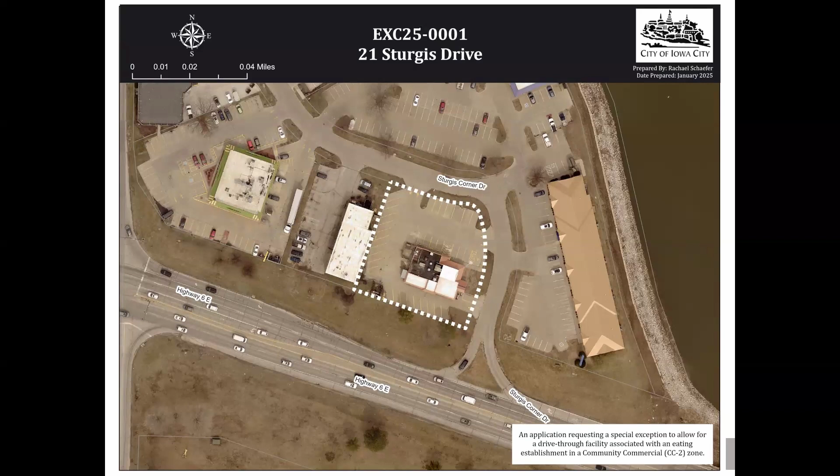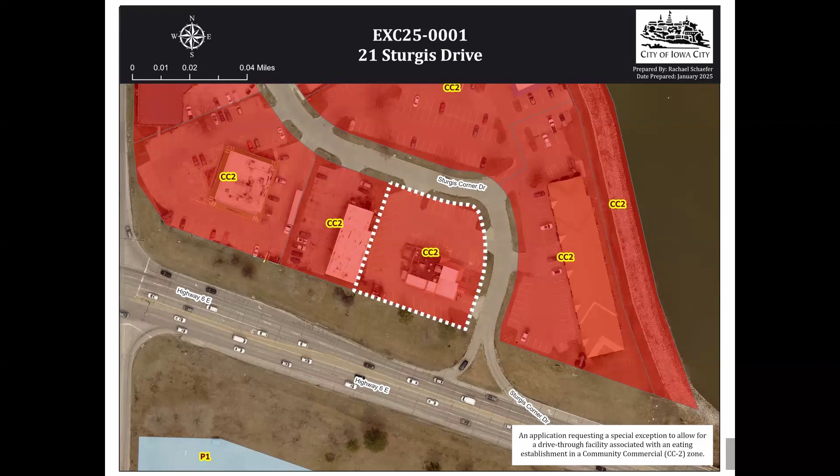To get into the background, 21 Sturgis Corner Drive is zoned CC2. Currently there is a Los Amigos restaurant occupying the existing eating establishment on site. The owner intends to maintain the same zone and use of the subject property, which is CC2 with an eating establishment use. The developer plans to demolish the existing structure and construct a new eating establishment with a drive-through facility. The new eating establishment is estimated to have around 2,300 square feet of usable space and an occupancy load of 49 people. The proposed drive-through would be a Chipotlane, a new drive-through format utilized by Chipotle.

The proposed drive-through lane will not include an order board, since its main purpose is to serve as a pickup lane for orders placed online via the app or through the website. Additionally, with this proposal, the city has requested a traffic impact study.

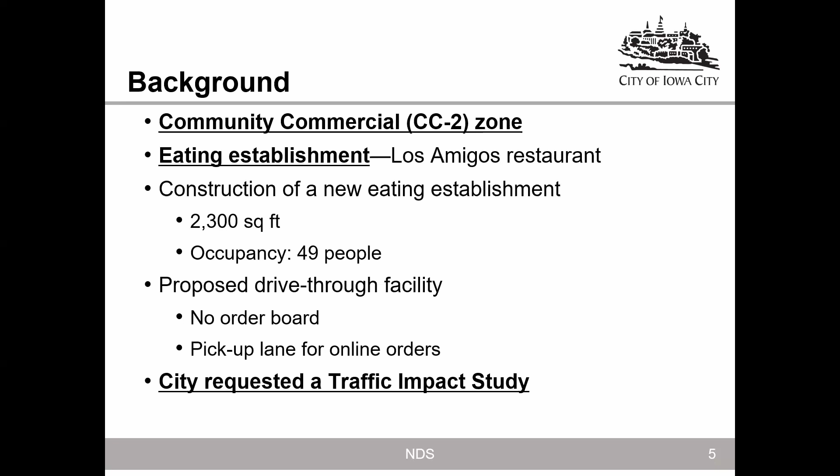The role of the Board of Adjustment: it is charged with approving with conditions, or denying the application based on the facts presented. To approve the special exception, the board must find that it meets all applicable approval criteria—specific standards pertaining to the waiver requested, and general standards for all special exceptions.

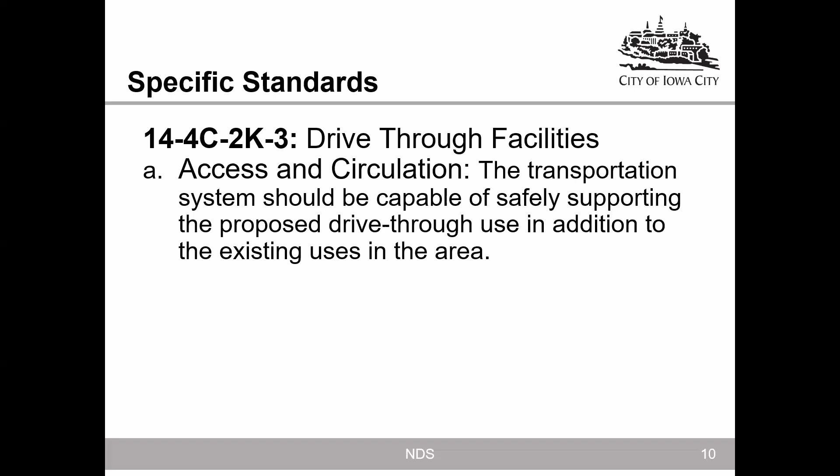Specific standards, 14.4C2K3, drive-through facilities. A, access and circulation: the transportation system should be capable of safely supporting the proposed drive-through use in addition to the existing uses in the area. Wherever possible and practical, drive-through lanes shall be accessed from secondary streets, alleys, or shared cross-access drives.

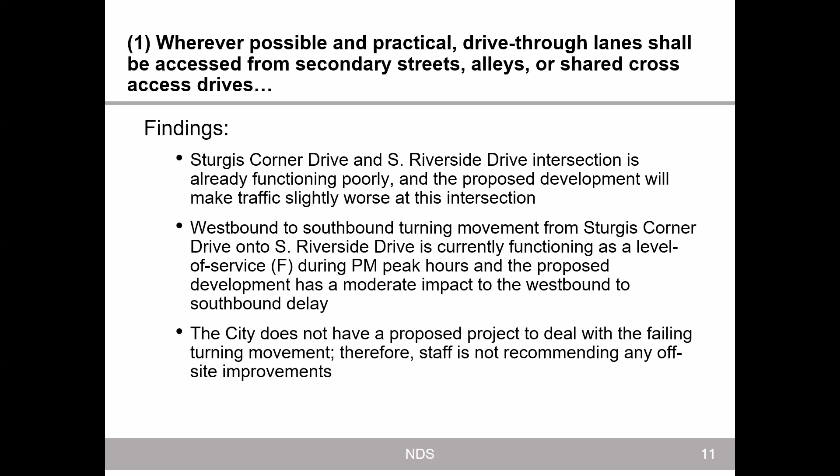Staff found that the traffic impact study found that the Sturgis Corner Drive and South Riverside Drive intersection is already functioning poorly, and the proposed development will make traffic slightly worse at the intersection. The westbound to southbound turning movement from Sturgis Corner Drive onto South Riverside Drive is currently functioning at level of service F during PM peak hours, and the proposed development has a moderate impact to the westbound to southbound delay. The traffic study also found that the city does not have a proposed project to deal with the failing turning movement. Therefore, staff is not recommending any off-site improvements.

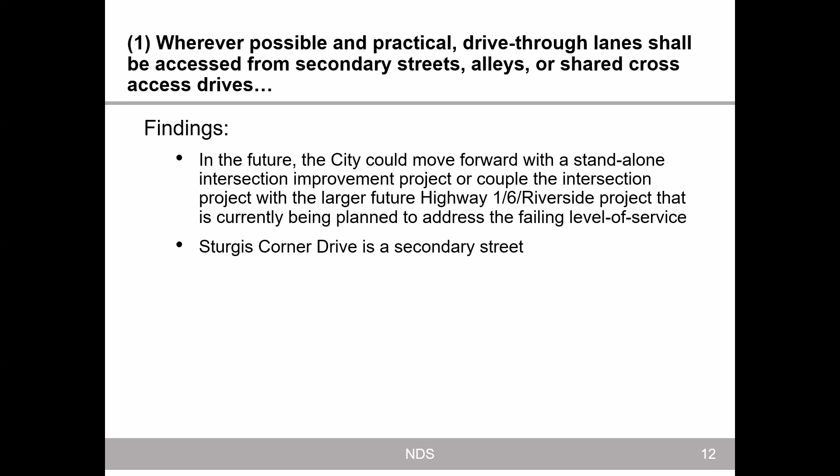In the future, the city could move forward with a standalone intersection improvement project, or couple the intersection project with the larger future Highway 1/6/Riverside project that is currently being planned to address the failing level of service. Additionally, Sturgis Corner Drive is a secondary street.

In addition to ensuring all standards are met during routine site plan review, staff is recommending general compliance with the attached site plan be a condition of approval to help ensure safe pedestrian travel.

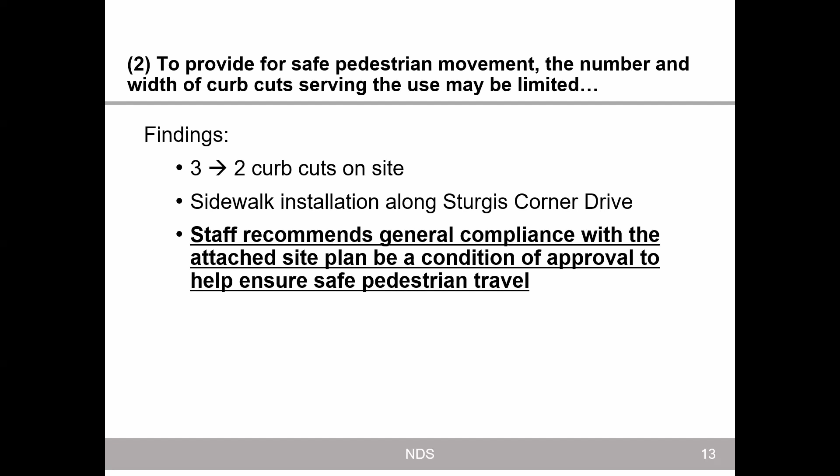An adequate number of stacking spaces must be provided to ensure traffic safety is not compromised. A minimum of 6 stacking spaces is recommended for drive-through facilities associated with eating establishments. As we saw earlier, the site plan did show there are 6 stacking spaces provided, and then the single drive-through lane leads to the pickup window and includes a bypass lane. The 6 stacking spaces do meet the minimum recommended number required for eating establishments. Additionally, the parking aisle around and to the drive-through provides additional space to help accommodate spillover traffic and minimize traffic safety impacts.

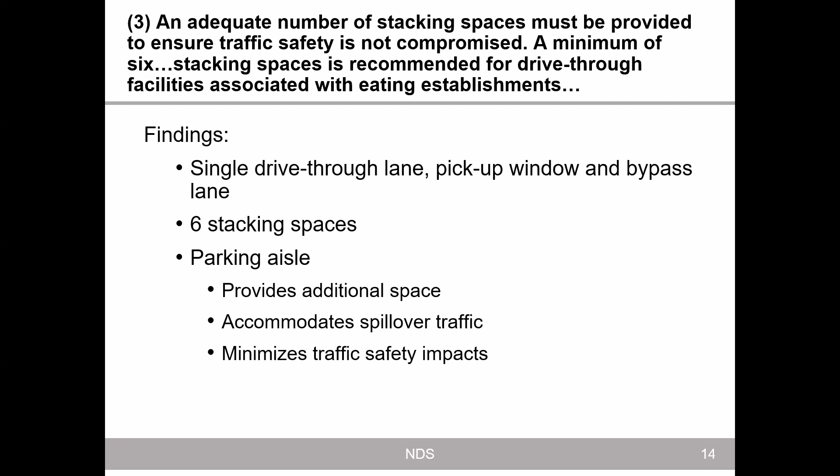Sufficient on-site signage and pavement marking shall be provided to indicate direction of vehicular travel, pedestrian crossings, stop signs, no entrance areas, and other controls to ensure safe vehicular and pedestrian movement. Staff found that the site plan included directional arrows throughout the site, found in the drive-through area and parking areas. There's a digital pickup-ahead pavement marking at the drive-through entrance, and there are do-not-enter signs at each one-way exit. On the site plan, there's a pedestrian route that crosses the parking drives to the west. The signage, in addition to the pavement markings, help prevent improper lane travel and promote safe vehicular circulation on the site, and pedestrian safety is improved by the pedestrian crossing designation.

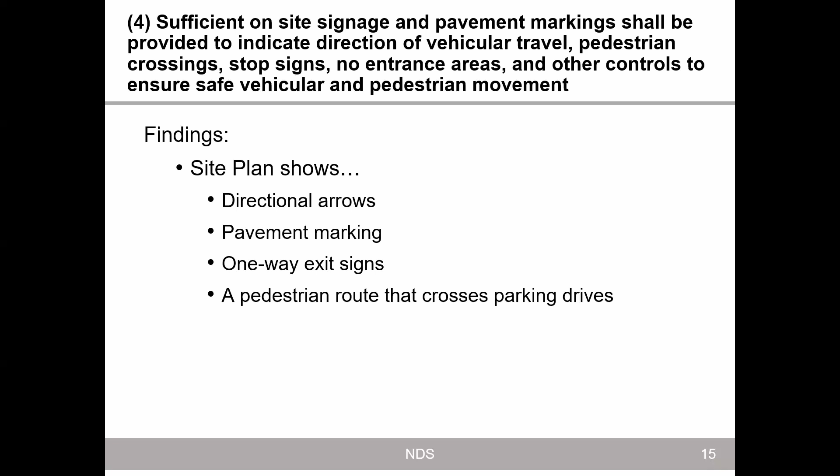Specific standards, 14.4C2K3, drive-through facilities. B, location: drive-through lanes and service windows must be located on a non-street facing facade, unless the applicant can demonstrate that a street-facing location is preferable for the overall safety and efficiency of the site, does not conflict with adjacent uses or pedestrian access, and does not compromise the character of the streetscape or neighborhood in which it is located.

Staff found that although a portion of the drive-through lane is located between Highway 6 and the building, this proposed design is preferable for the overall safety and efficiency of the site. The drive-through will not impact the design quality of the streetscape because it is located on the interior portion of the lot.

It's also adequately set back, and it's screened to the S2 standard from Sturgis Corner Drive, Highway 6 East, and the adjacent property to the west by the building and the landscaping. All of these factors help integrate the proposed drive-through lane into the landscape and streetscape design of the neighborhood.

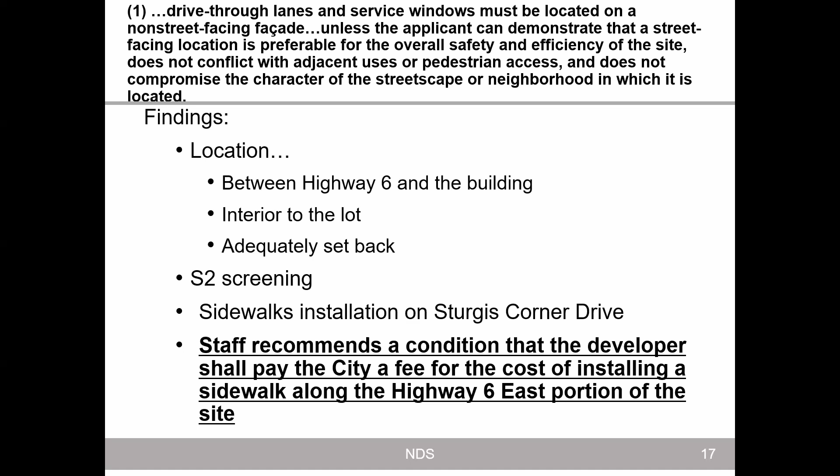As mentioned, sidewalks are to be installed on both sides of Sturgis Corner Drive. Staff recommends the condition that the developer shall pay the city a fee for the cost of installing a sidewalk along the Highway 6 East portion of the site. The sidewalk will be installed by the city at a future date, and this condition aims to improve the pedestrian environment.

Second, drive-through lanes must be set back at least 10 feet from adjacent lot lines and public rights-of-way and screened from view according to the design standards below. Staff found that the drive-through lane is set back 46 feet from the adjacent lot line to the west, and it's screened to the S2 standard. Staff will also ensure that all standards are met during site plan review.

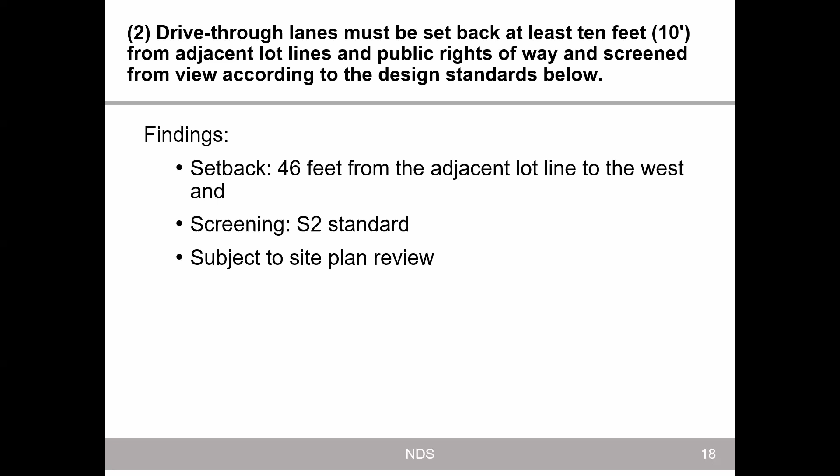Specific standards 14.4C2K3, drive-through facilities C, design standards. The number of drive-through lanes, stacking spaces, and paved area necessary for the drive-through facility will not be detrimental to adjacent residential properties or detract from or interrupt pedestrian circulation or the commercial character of the area in which the use is located.

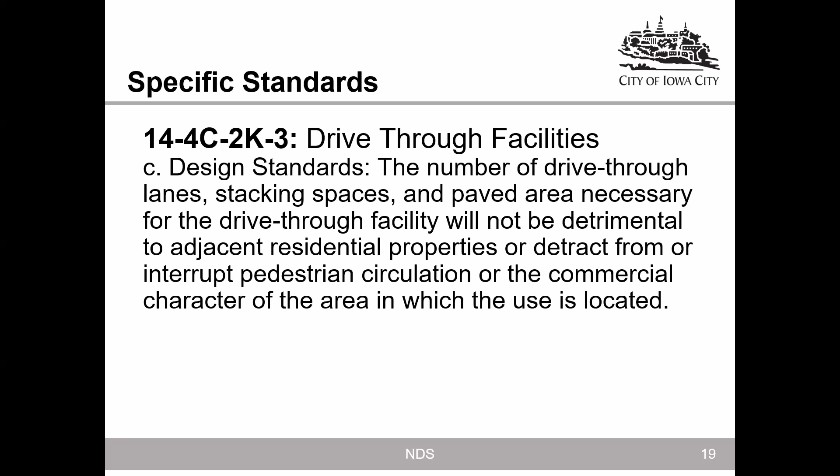One, to promote compatibility with the surrounding development, the number of drive-through lanes should be limited to not diminish the design quality of the streetscape or the safety of the pedestrian environment. The site plan proposes one drive-through lane at 10 feet wide, with a pickup window and one bypass lane which is 12 feet wide. The drive-through will not impact the design quality of the streetscape because it is on that interior portion of the lot. It's set back 46 feet and it's screened to the S2 standard from Sturgis Corner Drive, Highway 6 East, and the adjacent property to the west with the building and the landscape.

The sidewalks are to be installed on Sturgis Corner Drive on both sides. Again, to help improve the pedestrian environment, staff recommends the condition that the developer pay the city a fee for installing the sidewalk at a future date.

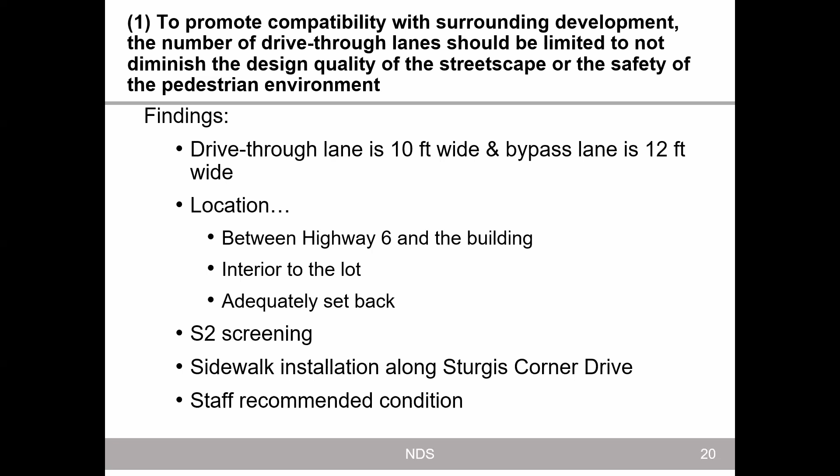Drive-through lanes, bays, and stacking spaces shall be screened from view from the street and adjacent properties to the S2 standard. If adjacent to residential use or property zoned residential, it must be screened from view of these properties to at least the S3 standard.

Staff found that there is only one drive-through lane proposed, and it will be screened appropriately to the S2 standard from adjacent properties and street rights-of-way. All surrounding properties are zoned CC2, and the neighboring property to the west is an auto repair shop, and the properties to the north and east are a mix of office uses. Generally to the south of the subject property there is Highway 6 East, and there are no residential properties in the surrounding area.

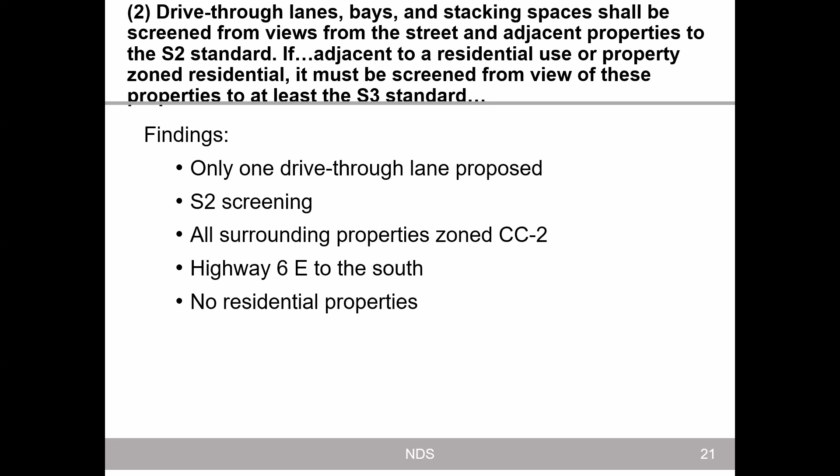Three, multiple windows servicing a single lane or stacking lane, e.g. order board, payment window, pickup window, should be considered to reduce the amount of idling on the site. There will be no order board associated with the proposed drive-through lane since orders will be placed on the mobile app and the website, in advance for pickup.

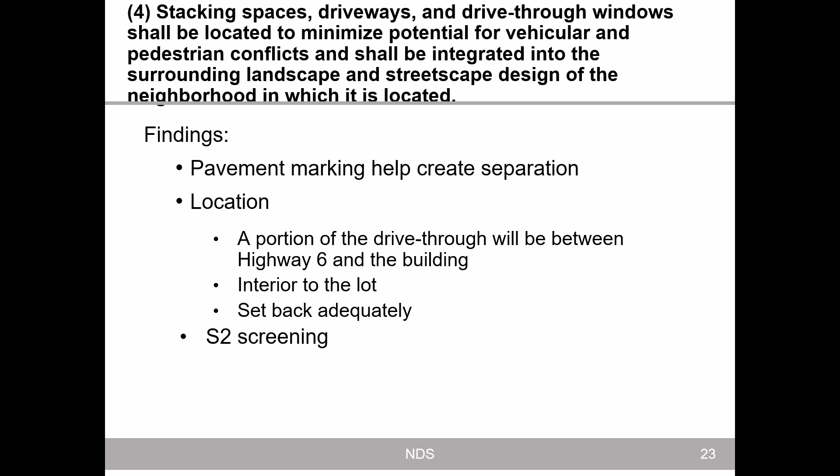Four, stacking spaces, driveways, and drive-through windows shall be located to minimize potential for vehicular and pedestrian conflicts and shall be integrated into the surrounding landscape and streetscape design of the neighborhood in which it is located. The drive-through lane is separated from the parking areas by pavement markings to help avoid vehicular conflicts. Since the drive-through is on the interior portion of the lot and it's screened from Sturgis Corner Drive and Highway 6 East by the landscaping, that ultimately helps integrate this proposed drive-through into the landscape and streetscape design of the neighborhood.

Five, lighting for the drive-through facility must comply with the outdoor lighting standards set forth in Chapter 5, Article G of this title, and must be designed to prevent light trespasses and glare onto neighboring residential properties. Staff will ensure lighting meets city standards to prevent light trespasses during site plan review.

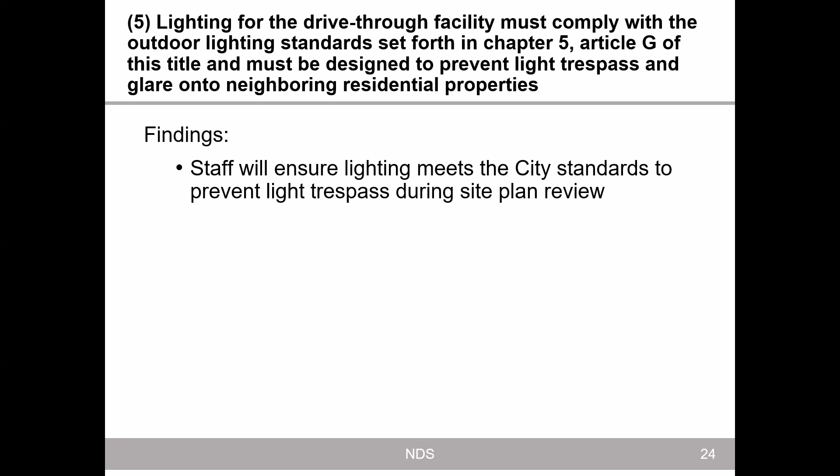Seven, loudspeakers—I'm sorry, six, repealed by ordinance number 164685 on 11/15/2016.

Now on to seven. Loudspeakers or intercom systems, if allowed, should be located and directed to minimize disturbance to adjacent uses. Special consideration should be given to locations adjacent to residential uses to ensure such systems do not diminish the residential character of the neighborhood. We know that no loudspeakers or intercom systems will be proposed with this drive-through lane, since orders will be placed in advance.

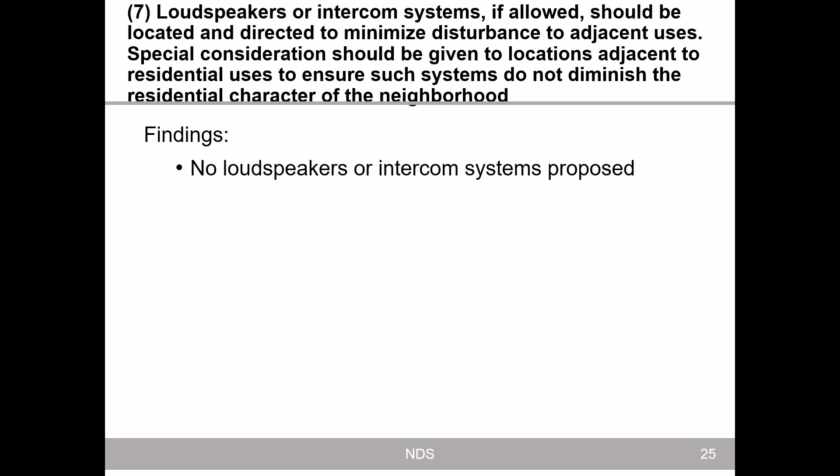General standards, 14.4B3, special exception review requirements.

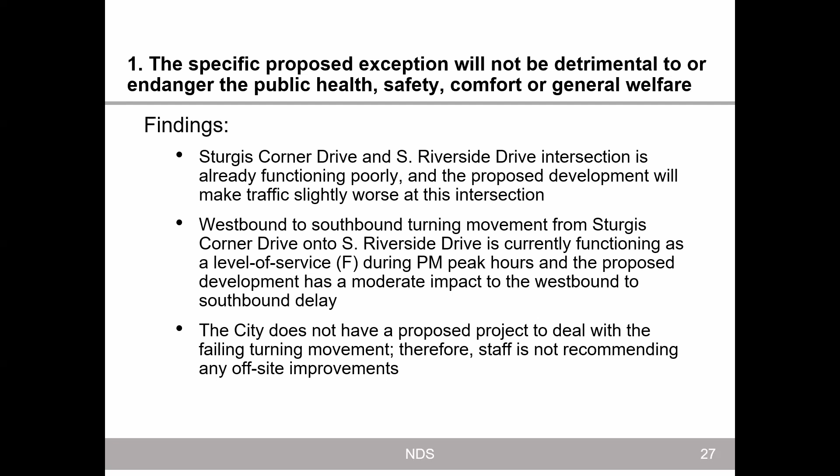First, the specific proposed exception will not be detrimental to or endanger the public health, safety, comfort, or general welfare. As required by the city, a traffic impact study was submitted, finding that the Sturgis Corner Drive and South Riverside Drive intersection is already functioning poorly, and the proposed development will make traffic slightly worse. The westbound to southbound turning movement from Sturgis Corner Drive onto South Riverside Drive is currently functioning at a level of service F during PM peak hours, and the proposed development does have a moderate impact to that delay. Currently, the city does not have a proposed project to deal with the failing turning movement. Therefore, staff is not recommending any off-site improvements.

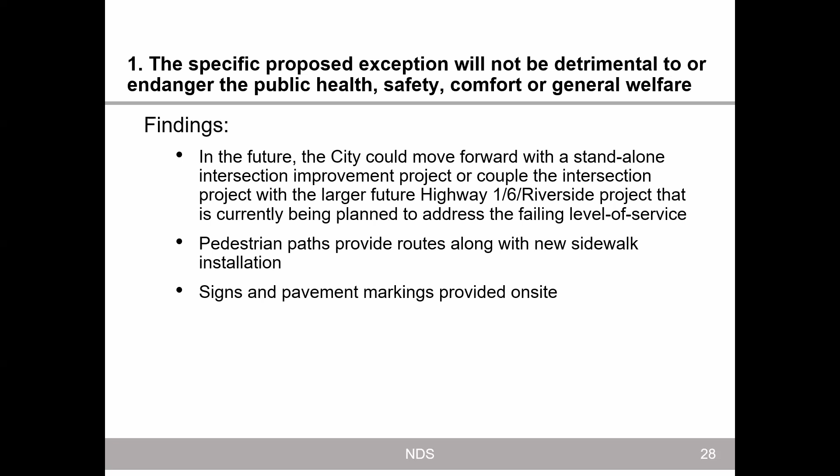Going forward, the city could move forward with a standalone intersection improvement project, or couple it with a larger future Highway 1/6/Riverside project currently being planned to address the failing level of service. Pedestrian circulation on the site will be improved with pedestrian paths providing routes within the site, as well as new sidewalks placed along Sturgis Corner Drive. The proposed signs and pavement markings will help efficiently direct traffic on the site, and on-site vehicular circulation and access are adequate to accommodate anticipated users and drive-through traffic.

Second, the specific proposed exception will not be injurious to the use and enjoyment of other property in the immediate vicinity and will not substantially diminish or impair property values in the neighborhood. The surrounding properties are all zoned CC2. The proposed eating establishment is a permitted use in the CC2 zone, and that's not going to change with this proposed development. The only abutting property is to the west, which is an existing vehicle repair use.

The proposed development will be required to incorporate screening along the western property subject to city standards. To the south is Highway 6 East, which separates the subject property from city-owned land directly to the south. This use does not interfere with the use of the surrounding properties, which include the vehicle repair and general office uses.

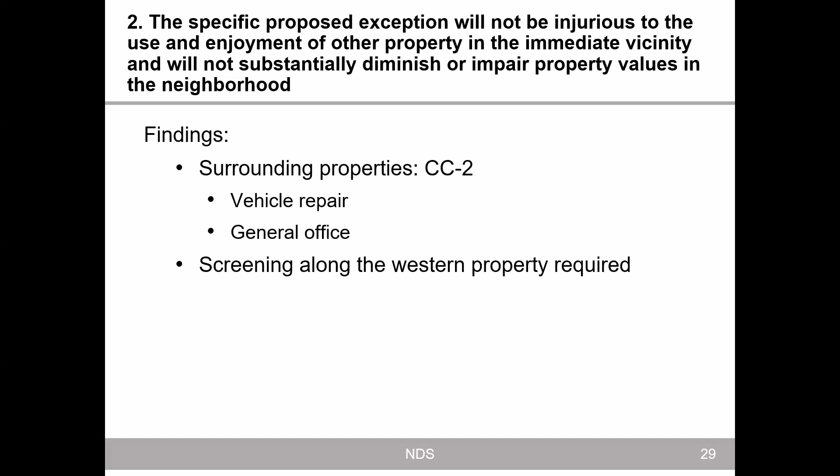Third, establishment of the specific proposed exception will not impede the normal and orderly development and improvement of surrounding property for uses permitted in the district in which such property is located. The surrounding properties are developed with general office uses to the north and east, vehicle repair use to the west, and Highway 6 and institutional use to the south. The proposed drive-through lane is on the interior area of the lot and will be appropriately screened from adjacent properties. This site is suitable for the proposed infill development since city services are currently provided to the site.

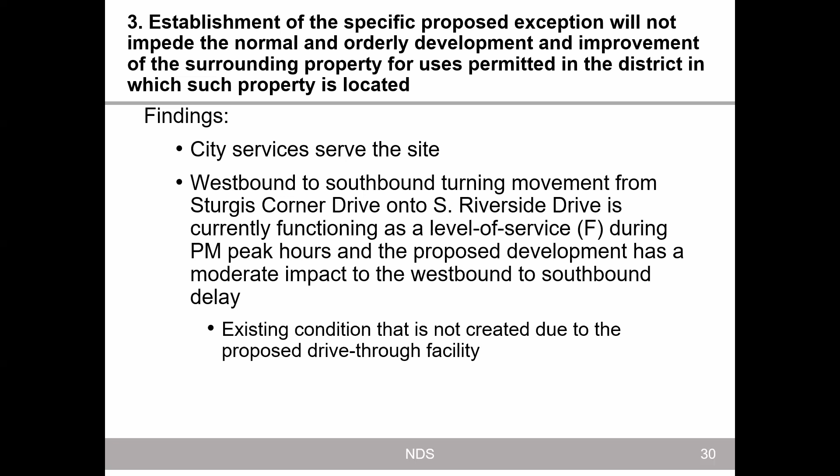This is an existing condition that may affect future redevelopment. I meant to say the westbound to southbound turning movement from Sturgis Corner Drive onto South Riverside Drive is currently functioning at a level of service F during PM peak hours, and the proposed development has a moderate impact to that delay. This is an existing condition that may affect future redevelopment and improvement. However, this condition is not created by the proposed drive-through facility.

Fourth, adequate utilities, access roads, drainage, and/or necessary facilities have been or are being provided. The subject property is an infill parcel surrounded by existing development. Sanitary sewer and water mains can service the subject property and have sufficient capacity to accommodate the proposed use. The traffic impact study found that the Sturgis Corner Drive and South Riverside Drive intersection is already functioning poorly, and the proposed development will make traffic slightly worse at this intersection.

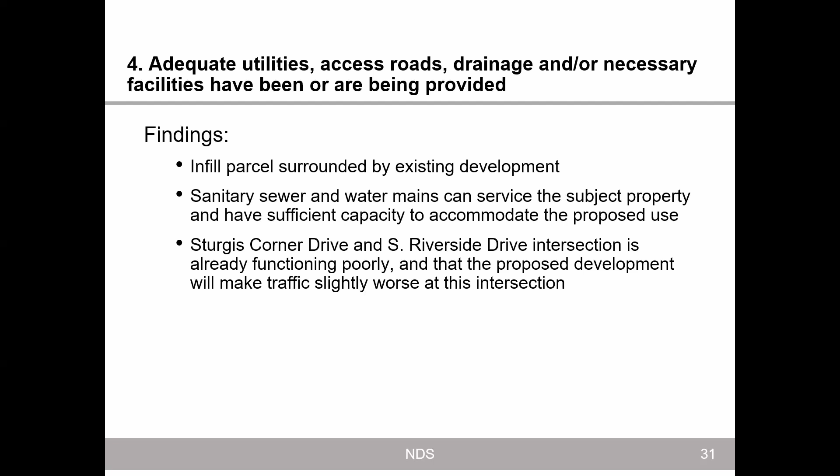Again, the westbound to southbound turning movement from Sturgis Corner Drive onto South Riverside Drive is currently functioning at a level of service F during PM peak hours, and the proposed development has a moderate impact to that delay. The city does not have a proposed project to deal with the failing turning movement; therefore, staff is not recommending any off-site improvements. In the future, the city could move forward with a standalone intersection improvement project, or couple it with the larger future Highway 1/6 Riverside project currently being planned to address the failing level of service.

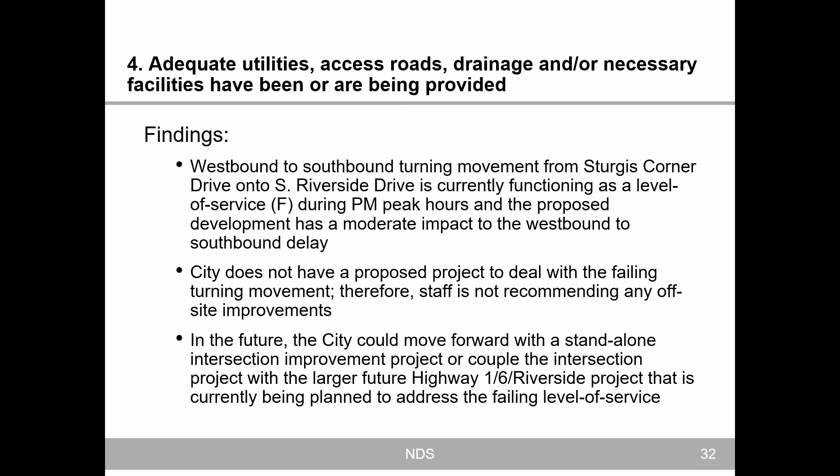Fifth, adequate measures have been or will be taken to provide ingress or egress designed to minimize traffic congestion on public streets. Again, the same notes from the traffic study apply: the intersection of Sturgis Corner Drive and South Riverside Drive is functioning poorly, and the proposed development will continue to make that traffic slightly worse. The failing turning movement in the westbound to southbound direction during PM peak hours sees a moderate impact from the proposed development. Currently, the city does not have a proposed project to deal with the failing turning movement, and staff is not recommending any off-site improvements.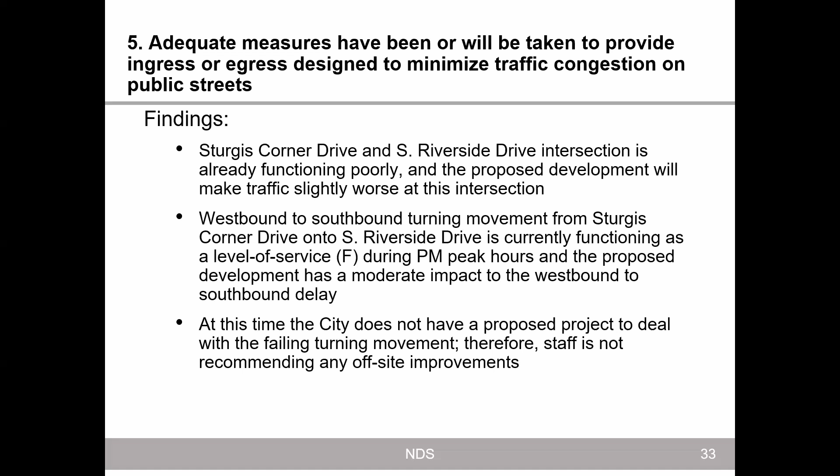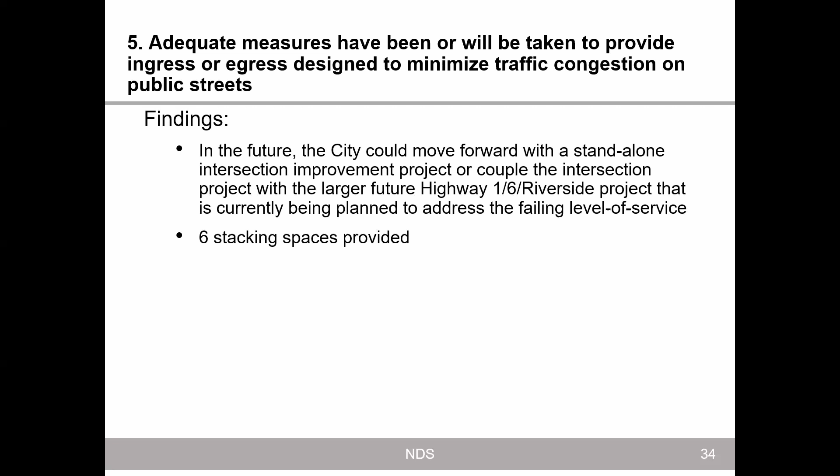In the future, the city could move forward with that standalone intersection improvement project, or couple the intersection project with the larger future Highway 1/6/Riverside project currently being planned to address the failing level of service. And as we know, the site plan did show that there are adequate stacking spaces, at the number of 6.

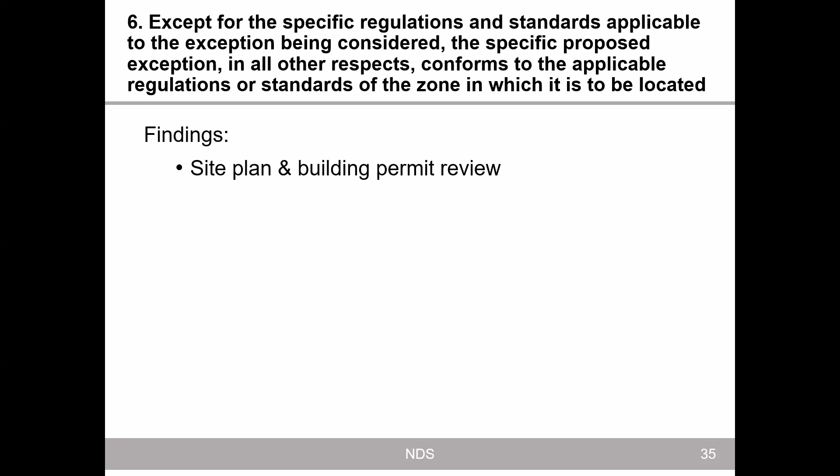Except for the specific regulations and standards applicable to the exception being considered, the specific proposed exception in all other respects conforms to the applicable regulations or standards of the zone in which it is to be located. Staff will ensure the proposed development conforms with all applicable zoning standards and regulations during subsequent site plan and building permit review.

The proposed exception will be consistent with the comprehensive plan of the city as amended. Staff found that the comprehensive plan's future land use map shows this area as mixed use, and the future land use map of the Southwest District Plan shows this area as community commercial. The comprehensive plan generally supports compatible infill development, and the proposed exception would allow the redeveloped eating establishment to include a drive-through facility, both of which are classified as commercial uses and are consistent with the city's comprehensive plan.

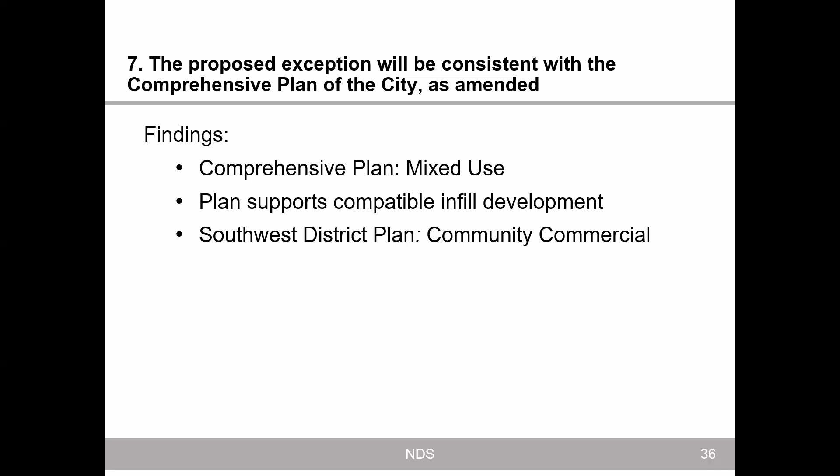Staff recommends approval of EXC 25-0001 to allow for a drive-through facility for the property located at 21 Sturgis Corner Drive, subject to the following conditions: prior to issuance of a building permit, the developer shall pay the city a fee for the cost of installing a sidewalk along Highway 6 East, to be installed by the city at a future date. Fee to be determined by the city engineer.

General compliance with the site plan dated 02-05-25.

If you have questions regarding the traffic impact study, there is a transportation planning staff member here tonight at the meeting to answer any questions you may have. And with that, that concludes the presentation, and now I will turn it back over to the board.

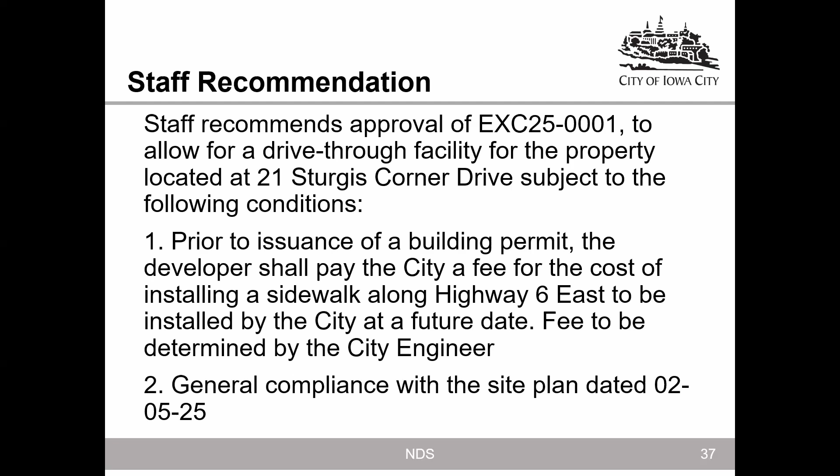Thank you. Any questions for the staff? I want to know what level of service F during PM peak hours means.

Hello, my name is Emily Bothell. I am the Senior Associate Transportation Planner. Good evening. Level of service really refers to the general flow of traffic.

When we look at level of service, we have level of service A, where we have free-flowing traffic. Vehicles are moving at a normal speed, and then it's all the way to an F. An F level of service means you may have more stop-and-go conditions and speeds may be variable. So it doesn't mean the intersection is not operating well and gridlocked, it just means the flow is not as steady as level of service A. And F is the bottom one.

Right, it goes from A to F, and once you get past a certain number, that's delay per vehicle, then it's just above that.

But that particular problem is the responsibility of the city, not of the person initiating this exception. Right now, the delay experienced at the intersection is not caused by this redevelopment, and the additional delay is marginal. I think the level of service impact is maybe 30 more seconds, and it's primarily for that westbound left turning movement.

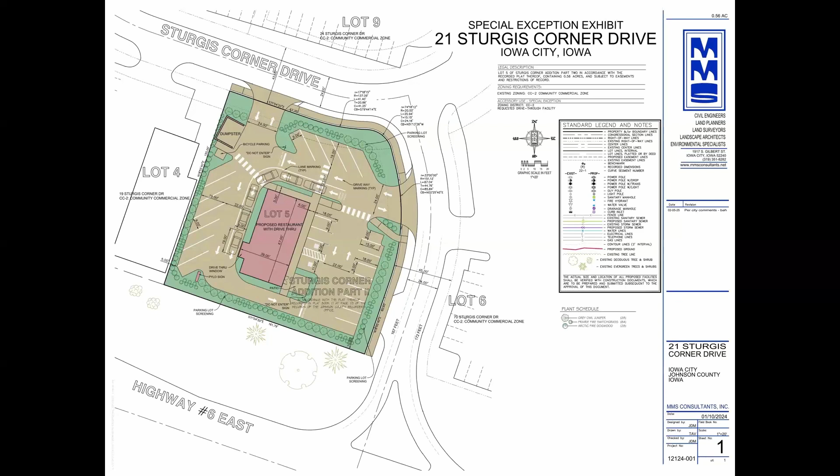So I don't have anything else to add. If you would like to speak, certainly. I'll address a couple other things quickly. Please sign in real quick. My name is Hans Kuhlman with Halifax Development.

Ms. Weigert, I'll address your question about ordering. You order on your app, and then you're notified when your order is ready to be picked up. So you would not get in the drive-through lane until you were notified that your order is ready to be picked up.

That would probably be the best case scenario, but my question—I've seen multiple comments online about people being held up in lanes because they were behind people still waiting for their orders. That's why I raised it. Respectfully, if you don't mind me asking, was that specific to the Chipotlane site in Coralville, or drive-throughs in general? Just Chipotlanes.

And if you have any other questions, I'd be more than happy to answer. On this same topic, I'll admit I don't use apps because I'm just old, but it seems to me as a business proposition there would be studies showing what difference this makes versus a regular drive-up operation of ordering, waiting, and picking up. Do you have any studies on that? Yeah, there's a significant study that shows the advantage. Staff, I believe—did we provide you all the Chipotlane study when we submitted our application?